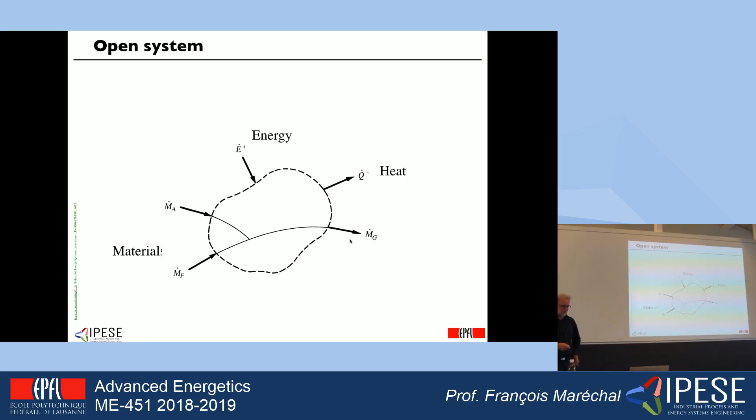In this system, what we can do is to write the first law of thermodynamics that is going to tell us that what is entering the system will leave the system, perhaps not in the same form, or accumulate inside the system. And most of the time we will ignore, at least for the time being, the accumulation, which means that the energy balance will be expressed as the sum of the work that is entering the system.

And just for those who are not used to this terminology, I would like to give the definition. So if you see a plus as a superscript, it means that it is positive when it is entering the system. When I use a minus as a superscript, it will mean that the value will be positive when it leaves the system. Okay.

So what I'm saying here is that the sum of the work plus the sum of the heat plus the sum of the energy value of the mass flows is equal to 0. And of course, something is going to leave and something is going to enter, which means that there will be positive and negative flows. So if the heat is leaving, it will have a minus sign here because it is accounted as positive when it enters, right? So it's a trick to be more general.

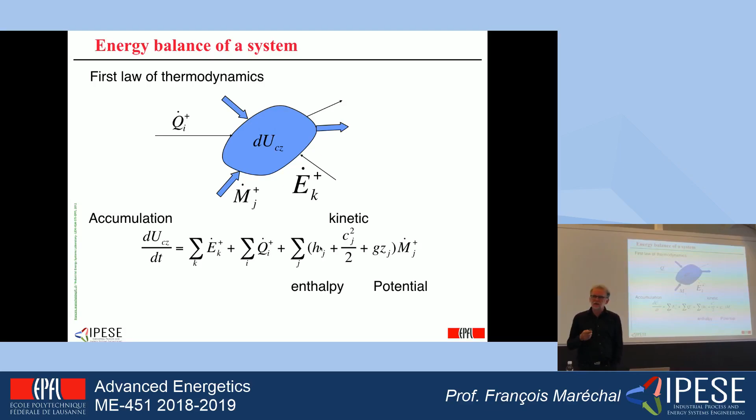So characterizing a state is typically done by characterizing the enthalpy, and the enthalpy is calculated this way. The enthalpy at the temperature and pressure is equal to the enthalpy of formation, so it's the amount of energy that is embedded into the molecules that we will use for the combustion, for example, plus a contribution that is a sensible heat, which is related to the Cp here.

At the same time, I can also write the entropy content. The definition of the entropy is coming from the ratio between the heat load and the temperatures, and the entropy is related to this ratio. The entropy at the given temperature and pressure is calculated as being the entropy of formation, so it's the entropy that is embedded into the molecule, plus a contribution that is Cp over T times the temperature variations, minus something which is coming from the pressure, which is R ln of the ratio between the pressure and a reference pressure.

Something which is important here is that the calculation of the entropy is always taken as a function of a reference, which has to be the same for all the flows that you consider, otherwise it will be very difficult to make comparisons. But don't forget that this reference is always there, even if we simplify or oversimplify, and it's selected arbitrarily. As I'm a chemical engineer, the reference is, for example, the gas state at 1 bar and 25 degrees C, which might not exist in reality, but it will be my reference for making all the calculations.

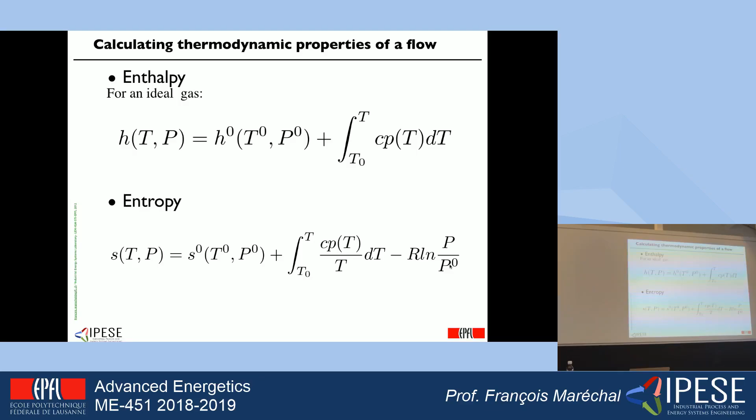So when we have a flow which is composed of more than one compound, then what we have to do is to make the sum of the contribution of each of the compounds. So it means that the enthalpy of a mixture is the weighted sum of the enthalpy of each of the compounds of the mixture. And each one has another Cp, so this one is specific to each of the compounds.

And when we mix streams, to calculate the entropy we have to add the contributions of the mixing, which is coming from the entropy created by the fact that each stream has a certain concentration. So we can express this as being the energy that would be needed to separate them as separate compounds. Okay, so this is the entropy.

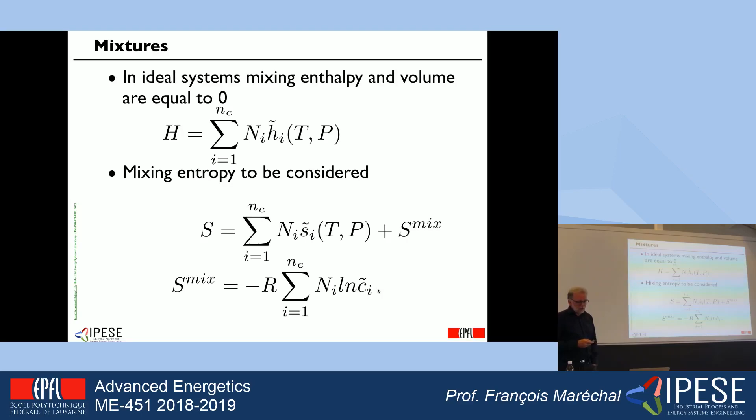When we have this, we can apply two very important principles. The first one is that the energy is conserved, as the mass is conserved. So I cannot create energy, I cannot produce energy. Are there people from electrical engineering here? No. So in electrical engineering, they have the temptation to say that they are producing energy. Energy cannot be produced, impossible. Electricity can be produced out of another form of energy, this I have no problem with. But the energy cannot be produced. This is what the first principle is telling us, which is expressed by this equation here. So the work plus the heat plus the energy content of the mass flows is equal to 0 if there is no accumulation.

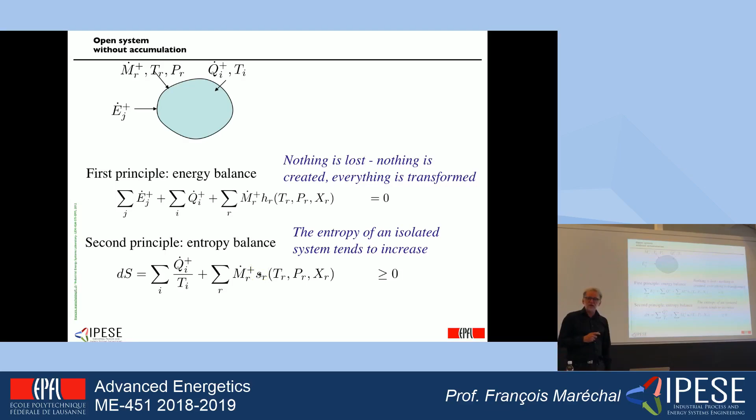And then there is a second principle of thermodynamics that tells us that the entropy of an isolated system is always increasing, which is expressed by this expression here. So those are the contributions of entropy of the heat. The work is a pure form of exergy, so it has no entropy content. And then you have the contributions coming from the mass flows, which are associated to the entropy content of each of the mass flows. So now what I can do is to take the two principles and combine them. This one is expressed in form of energy, so in this case it's kilowatt.

The entropy variation is expressed in kilowatt per degree K. Okay, you can see here. But it means that if I'm multiplying this equation here by a reference temperature, which is the temperature of the environment, then I have two equations, this one and this one, that have the same unit, so I can make the sum of the two. Okay? So if I can make the sum, I can also make the difference.

So what I'm going to do now is making the difference between the first principle, which is the energy balance, and the second principle multiplied by the TA here, which is then creating this equation here. And this equation here, as I have made a minus here, is telling me that the contribution of the work plus the contribution of the heat load multiplied by this factor here, which is the Carnot factor, plus the enthalpy contributions minus the TA times the entropy contributions, and this term here is what we name the co-enthalpy, has to be bigger or equal to 0. Lower, equal to 0. Okay?

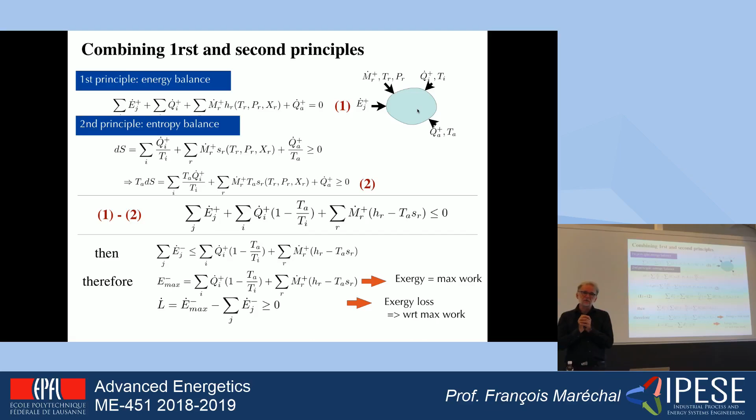Okay? And this system is satisfying the energy balance. So it is satisfying the equation here. So it means that everything is well settled, but I have lost the capability of producing a certain amount of work. Okay? So this is really important for you engineers. Because it means that if you have any device or any system that is converting energy, following the first principle of thermodynamics, you can calculate the amount of work that you will never be able anymore to produce, okay? And the better you will be, the lower this value will be.

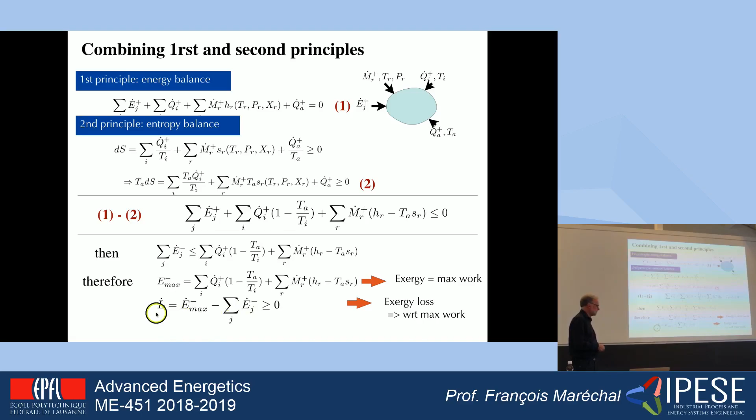Okay? And it's important to realize that when I'm writing this equation, in fact, the work is Exergy. There is an equivalent Exergy value of the heat, which is expressed using the Carnot factor, and the Carnot factor is expressed, so we are talking about thermodynamics. When we speak about thermodynamics, temperatures are in Kelvin, right? Okay? Always.

So you have here the Carnot factor that is applied to the heat, considered with the temperature at which the heat is available, which defines what is named the heat exergy. And then you have here the exergetic value of each of the mass flows in the system, which then afterwards relates to the Exergy loss, which is the temperature multiplied by the variation of the entropy. So the simplification of this expression is here.

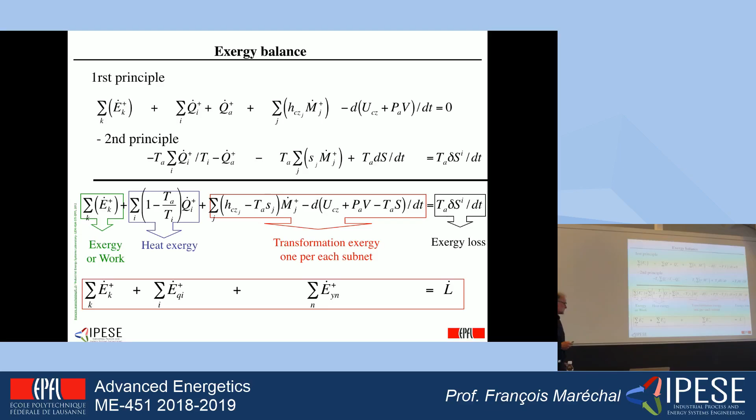Now, if I want to express what is the exergy content of a fluid that is going to be cooled down. So it means, let's assume that I have a fluid that is at the given inlet temperature here, and that is going to be cooled down to the outlet conditions here. In fact, I can define this in two different ways.

Yeah? But just for the notation, the plus and the minus, what does it mean? It's the input and output, or... The plus is indicating that with respect to my system, when the flow is entering my system, if it has a plus, it means that the value will be positive. And my point is that it is with respect to the system that I have selected. So it depends, and I will show you an example here.

So the heat, in this case, I will define the heat that I receive. For my system, I will receive heat, so it will be counted as positive when entering the system. And I'm going to produce electricity, and I'm therefore going to use the minus to declare the electricity that is produced will be positive if it leaves the system. So it's just to highlight the flow direction. And it simplifies the complexity of the equations. Otherwise, I would always have to write the sum of the inlets minus the sum of the outlets.

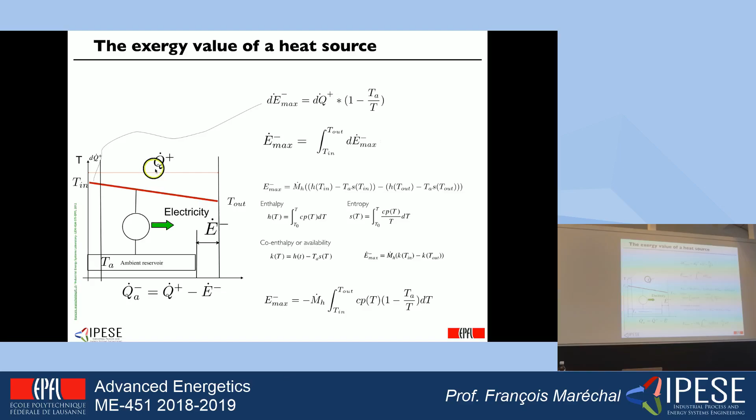But it's interesting because it means that the heat delivered by the enthalpy difference between T in and T out can be expressed as a value of the heat delivered for a given mean temperature, which is the logarithmic mean temperature. So this allows me to be quite precise in the definition of the amount of work that can be produced when I'm doing a heat exchange.

Now, something that would be nice would be to know what is the amount of effective work that I can produce out of the maximum amount. Because the maximum amount, I know it is a process that has to be infinitely slow, which would require a very, very big area so that it can go back always at any time. It means that it's not interesting from the engineering point of view.

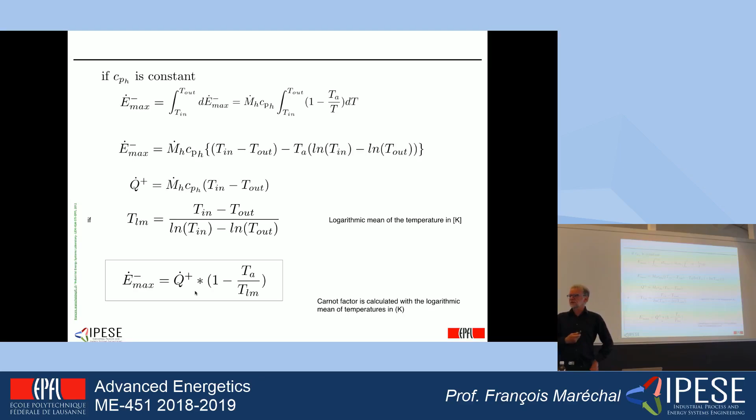So now what we can say is that I can compare the work that I would produce by cooling this stream and having a very nice machine that is going to really produce a certain amount of electricity or work here. And what I can tell you is that a priori, there is what we name an efficiency, that is the ratio between the amount of work that is effectively produced compared to the maximum amount that can be produced. And this ratio is of the order of magnitude of 55%. So this is the order of magnitude of what the engineers are doing today.

You give me a heat load of hot water coming from the ground, and I can convert it into electricity with an efficiency which is the maximum efficiency calculated here, obtained by this Carnot factor, multiplied by 55%. 55, 56, the better you are, or the more sophisticated you are, then the efficiency is going to increase, right?

But this is easy to take as a rule of thumb because I do not have to then design the system. So what I'm saying is that I know that someone in my colleagues will be able to design a system that will have this 55% efficiency, which means that I do not have to design the Rankine cycle that is going to convert the heat that I have here. I have already a guess of how much it will deliver.

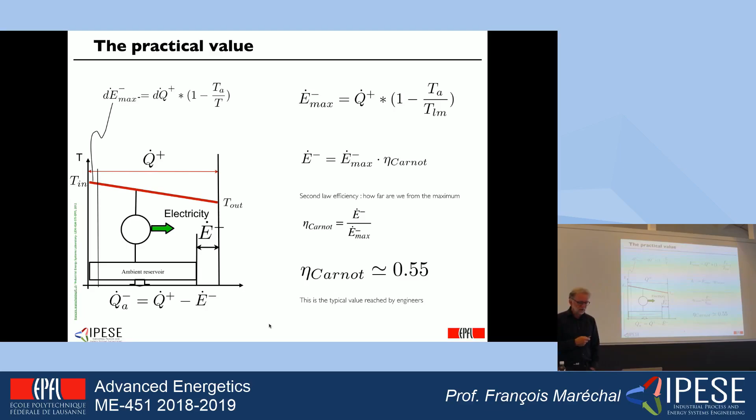Another thing which is very important with the exergy is the fact that it is reversible. It means also that I can calculate the amount of work that would be needed in order to heat a flow from an inlet temperature to an outlet temperature. And this is quite interesting because it would mean that I would install a heat pump in reality, taking the heat from the ambience and then heating the flow here. And I will calculate how much electricity I have to consume, the rest coming from the environment.

And this is also very important because it gives also then the reverse value. So how much do I have to pay to go from this temperature to this one? For example, how much exergy or work do I need to heat a house which is at 20 degrees C when the temperature outside is 0? And it will be very small.

And the 55% works as well for the heat pumps. And in this case, of course, this is the minimum amount of work that is needed. The reality is that I will need more, so I will have to divide by this 55% to have the real amount that will be consumed by the corresponding heat pump.

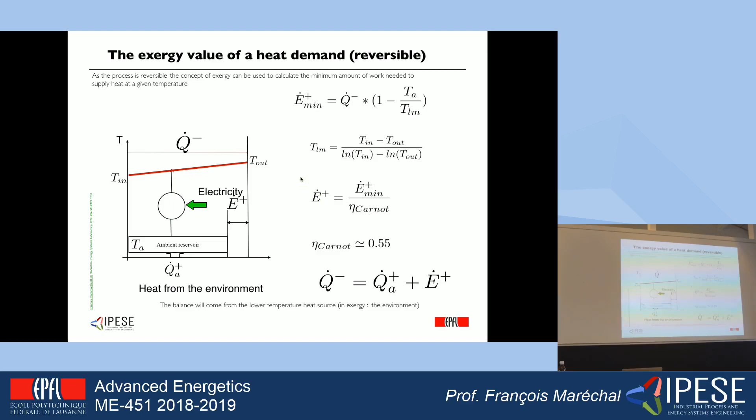Which means also that I can then afterwards calculate what are the exergy losses that occur in a heat exchanger. So in a heat exchanger, I have a hot stream that is cooled down, and I have a cold stream that is heated up. So now I can say, well, the hot stream that is cooled down would have the possibility of producing a certain amount of work by exchanging with the environment, and this will give me this value here. And this one needs a certain amount of work to be heated, and this will give the value here.

And the difference between the two is the amount of work that I could have produced. So I'm producing work here and consuming work for heating the flow here. So the difference between the two is a given amount of work that I could have produced, but that I cannot produce anymore.

Okay, so this is the losses that occur inside the heat exchanger. Right? And this is the formula that allows me to calculate what are the exergy losses in a heat exchanger. Okay, and this value is indeed very useful to know if a heat exchanger is well placed or destroys a lot of exergy because of a big temperature difference between the two. Okay?

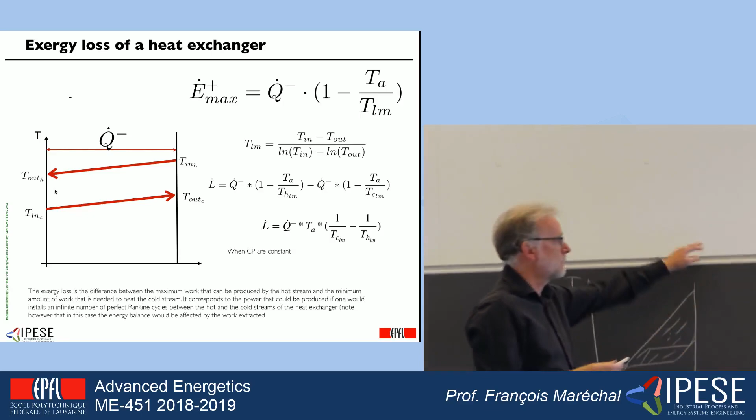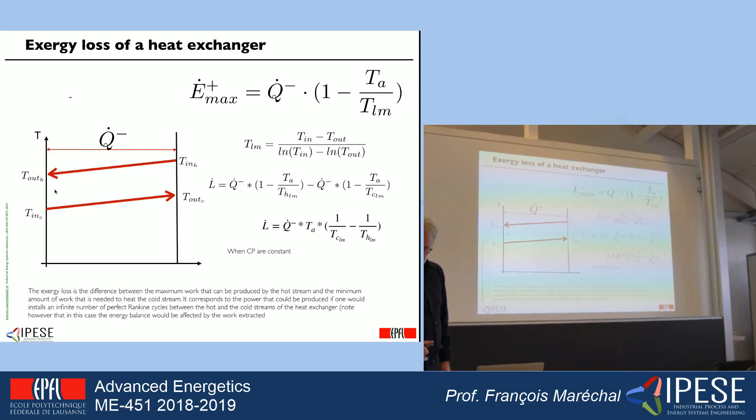But you said the losses are the max exergy that we can have, and we remove the effective exergy that we really use. And you said the effective one is the Carnot factor times the max exergy. So say it again. The losses are the max exergy we can have, and we remove the effective exergy we use. No, which is defined as being the minimum amount of work that is needed to heat. Okay, so it's on both sides.

It's reversible processes. So what I'm making as a difference is the amount of work that I could have produced by cooling down the hot stream here, minus the minimum amount that is needed to heat up this one. And the difference between the two is lost because I could have extracted more electricity or work a priori, but by the fact that I have installed this heat exchanger, I cannot do anything else. It's too late. But it allows us to understand what is happening inside the system. Okay?

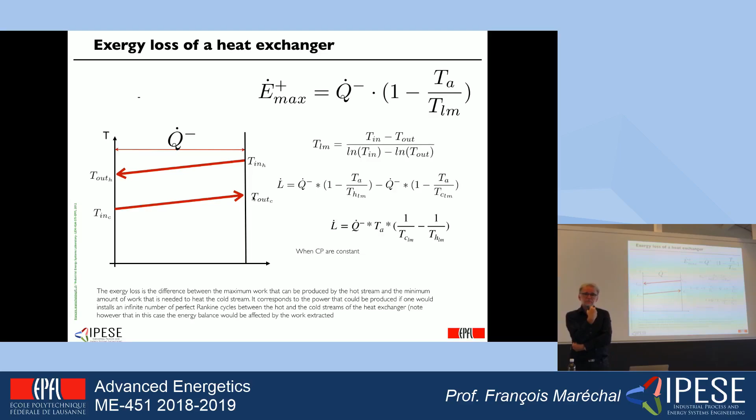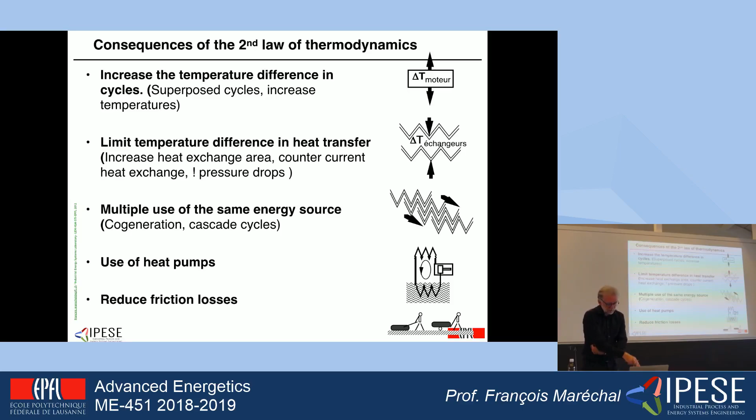So, I will perhaps keep this one and go into this one. So I have discussed the effect of the heat. We can also have the same analysis when you do an expansion. It means that you can always do a heat exchange with the environment and then an expansion, then recovering the mechanical work. And again, we will have the same expression here.

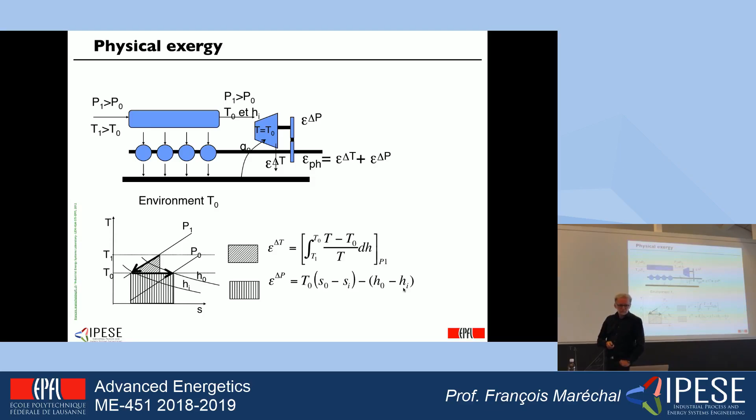So you will have a part that is coming from the temperature and a part that is going to come from the pressure, which will translate into another dimension, which introduces the effect of the pressure in addition to the effect of the temperature. So the ln here, which is coming from the integral, is associated to the temperature, and this one is associated to the pressure change.

Which means that by using the concept of entropy and enthalpy, we have the possibility not only to characterize the exergy or the work potential of streams that change in temperature, but also the potential of streams that change in pressure in a compressor or in a turbine.

And something which is interesting with the exergy related to compressors and turbines is that typically we calculate it with isentropic efficiency, and the isentropic efficiency is in fact related to the maximum amount of work that can be produced if the process is isentropic, so without creation of entropy, which means that the exergy losses of an expansion or of a compression is in fact the difference between the isentropic enthalpy and the real enthalpy of the system. It is a T times delta S.

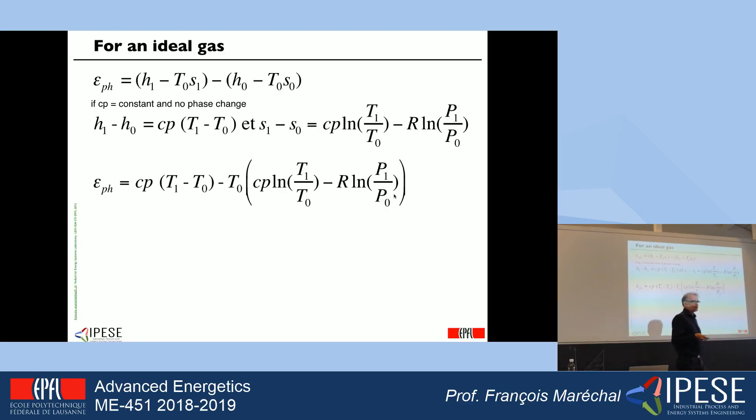And then I can also do the same reasoning for combustion, for chemical reactions. In this case, I will have to account for two different aspects. Because if I'm doing chemical reactions, it means that I have some molecules that are in a given state, and by making the chemical reaction they will create new molecules, which will have new states. So for example, I will have methane, CH4, and I will produce CO2 and water.

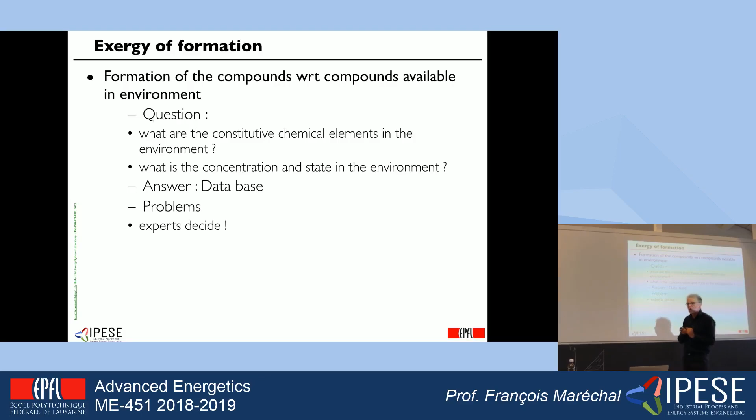So if I want to be able to calculate the co-enthalpy, so the capacity of producing work of those flows, I will have to look at the composition, and I will have to take into account the enthalpy and the entropy of formation of the different compounds that are concerned: the ones that are in the original state, so the fuel, and the ones that are in the target state or the end state, which is the CO2 and the water.

And something which will be difficult there is that I will have to decide what is the equilibrium with the environment. So I need to know the quality of a molecule that is emitted. For example, I'm going to emit SO2. What is the value of this compound compared to an equilibrium state in the environment? And there, it's not always so clear what is the best state to consider.

So, for example, I have water. Do I consider water in a gas phase in equilibrium with the air that is in the environment? Do I consider the liquid state, which is the water which is flowing just nearby? So I will have to be a little bit careful with this. The other dimension being related to the concentration.

I have carbon dioxide in my chimney that has been produced by combustion. In fact, this carbon dioxide has a higher partial pressure than the carbon dioxide in the atmosphere. So it means that officially I can expand it from the partial pressure that it has in the chimney to the partial pressure that it has in the environment. So officially I also have to take into account this diffusion energy that is hidden there.

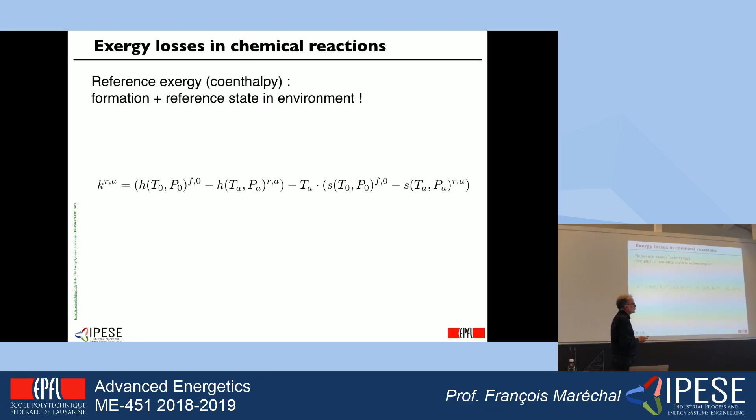Which means that for the enthalpy and the entropy of formation, we need to have a consensus definition, and I give you one. I'm not sure that it is the only one that can be used, but at least those ones have been fixed by a list of scientists that defines the co-enthalpy for the different fuels that we have here and the corresponding chemical reactions, which allows us to have the entropy and the co-enthalpies of any fluid that we are going to deal with in our lecture.

And so here I'm comparing the heat of reaction, and I will take an example: the heat of reaction of methane. The energy is 50,000. This is the lower heating value, this is the higher heating value, and the exergy content, so the co-enthalpy, is 51, so it is something in between. And the reason for this is that the higher heating value is going to condense everything, while here the water will remain in the gas phase, partly.

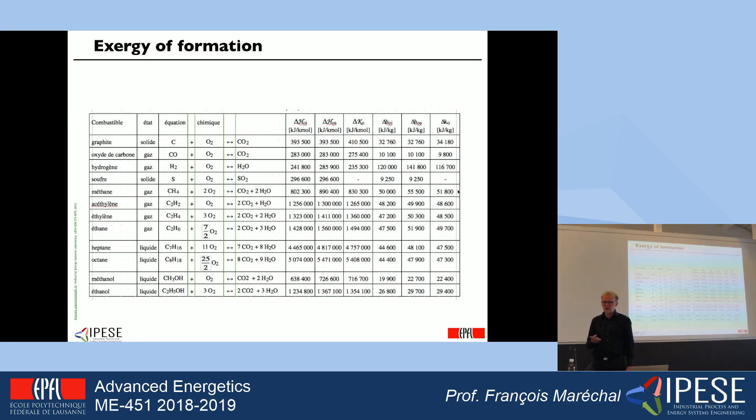Right, so now I have the way to characterize the heat flows, the mechanical or the physical transformations, and to characterize the flows that I have in the system. So it means that I can make balances that will allow me to assess the efficiency of systems.

So for example, what I will do is that I'm going to look at the amount of exergy that I'm buying in my system. So the amount that enters in form of heat, the amount that is entering in form of work, the amount that is entering with the mass flows that are entering the system at the state where they are. So each entrance is specific, of course, with a given composition.

And I will make the sum of all the exergy that is delivered by the system in form of heat, in form of work, and in form of transformed compounds, or flows that are leaving the system, right? And now I can look at the efficiency of the system by making the ratio between the exergy that is delivered, which is the exergy content of the flows leaving the operation, and the exergy that is consumed, which is the exergy that is entering the system.

Now, if I'm looking at the balance, I can define it as a function of the losses, because the efficiency is also 1 minus the losses divided by the exergy input. Okay? You all agree? I guess that the answer is yes. Right? Okay? So you all agree, but I would like to insist on something.

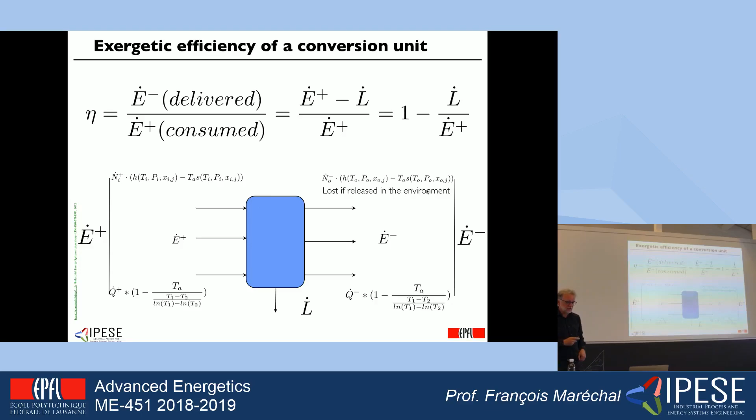And then, of course, we have also to look at systems in a broader sense. So we do not look at one unit, but we can have a combination of units. So, for example, here, it's a gas turbine that is entering with a given amount of fuel. Pay attention that I'm not entering the air because it is coming from the ambient, so I'm just considering that it is zero from the exergy point of view.

And this amount of energy is being converted into work and into heat for heating a fluid from T1 to T2. And there I have to express what is the exergy efficiency of the system. So from the energy balance, it's not so complicated to write. I have the amount of energy that is produced by the efficiency of the gas turbine, and then the amount of heat that is delivered to heat the flows from T1 to T2, which corresponds to cooling the gas from T3 to T4.

Okay, and therefore I can calculate also the amount of energy that I'm losing here by releasing the heat to the environment at T4.

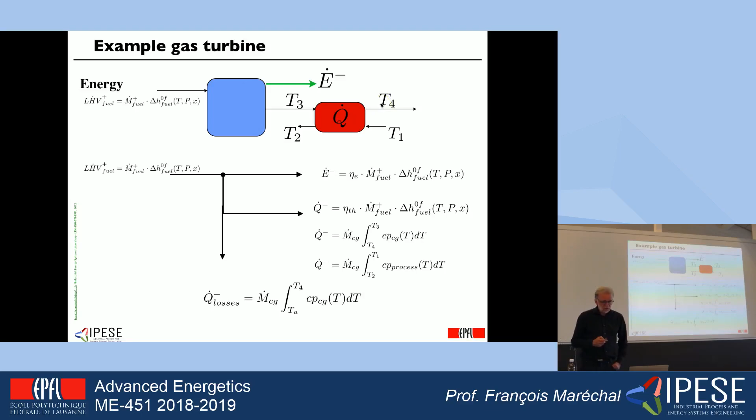The exergy value will give me another definition, because then I will see that there is a part of, and this is what is named the Sankey diagram, where we try to represent what is the share of the different forms of exergy. So here I have the total amount that is entering in form of fuel. Out of this fuel, I have a certain amount that is expressed in terms of exergy as being the electricity that is produced. And there is another part, which is the exergy that is made available in the combustion gases at T3.

That could be cooled down to T ambient and gives me a certain amount of exergy that is valuable here. Which means that out of the total amount of exergy that has entered the system, there is a part that is useful in form of work, a part that is useful in form of heat, but there is also a part that is already lost. And this is lost because I have realized a combustion in the gas turbine burner. And I have lost some exergy because my compressor is not 100% isentropic and my turbine neither. So it means that I have lost a certain capacity to produce work by the operations that happen in the gas turbine.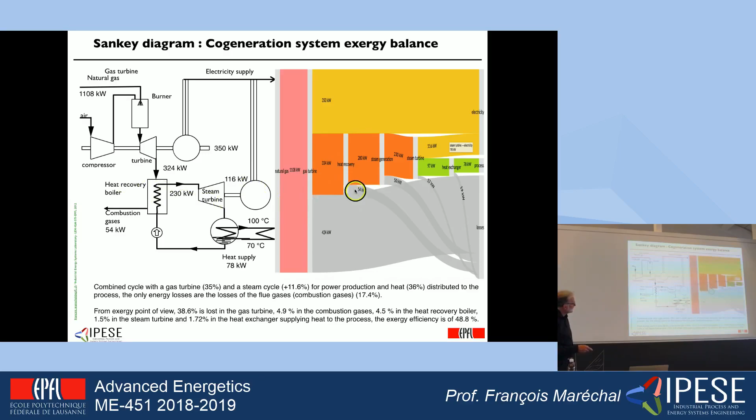50% more or less, so not far from the 55, but I know that if I had to increase the efficiency of this system, I would have to increase the temperature of the steam turbine, perhaps use two pressure levels to be more efficient in producing more steam, which would then mean that I would convert part of what is lost here and here into more electricity to satisfy the needs of the process. Okay? Questions about this? No question?

So there will be a Speakout that will be open for next week, because you will have to do an exergy analysis of the process that you have been asked to evaluate up to now. So now you have the flows, you have the enthalpy. Most of the operations are related to heat exchange, and so you will be in a position of either plotting such a Sankey diagram, or at least calculating the exergy loss in each of the units in the system and identifying which are responsible for the major losses. No questions? Crystal clear? So let's apply them.